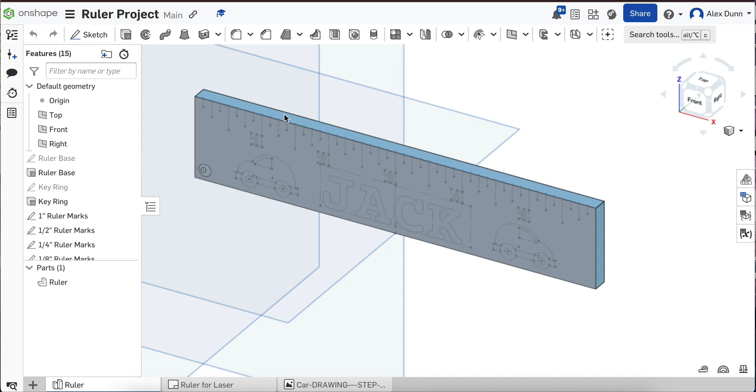I'll show you how to do some different things with your ruler: how to create the base outline, how to extrude it, and then how to draw some of the stuff on the face of the ruler.

This is my example that I showed you in class, but I'm going to start a new part studio just like you guys. I'm going to rename that ruler V2 because this is my second ruler.

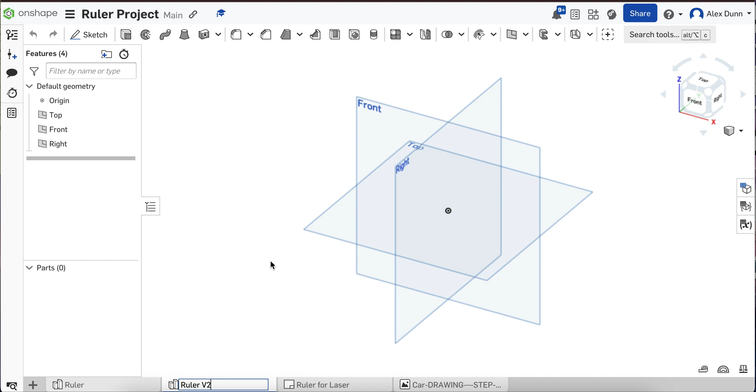Everyone should create their sketch on the front plane, because when we're laser cutting it, we're only laser cutting the front of the ruler, not any other part. I'm going to do a center point rectangle starting at the origin, and your ruler dimensions need to be 6 inches by 1¼ inch. So that's the base of your ruler.

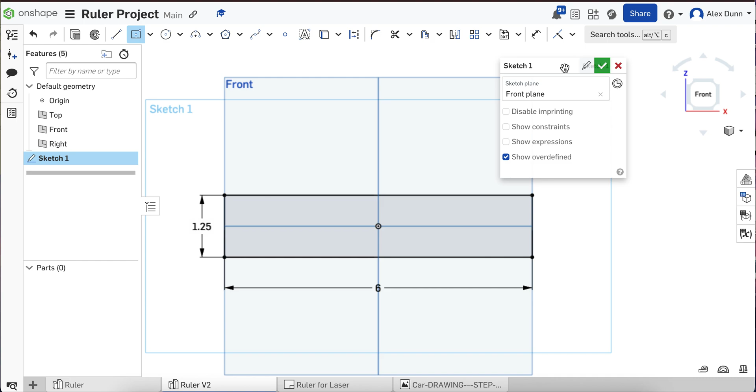Obviously you want to be naming things, but I'm just doing this as a tutorial, so I'm going to go as quickly as I possibly can so I'm not boring you guys.

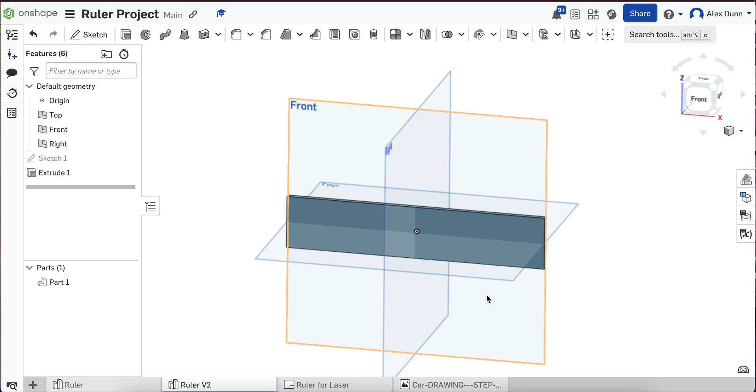Before you start sketching anything, we're going to extrude this to its thickness. You'll all be using acrylic that's 0.11 thick or masonite that's 0.11 thick, depending on what we decide. So it's going to be extruded to look like that. I'm going to hide all the planes so when I'm looking at my ruler, I'm not getting an obstructed view from anything else.

In order to draw on our ruler, we need to make a sketch. My recommendation is that you make each set of lines in a different sketch. That's going to help us once we're prepping for the laser.

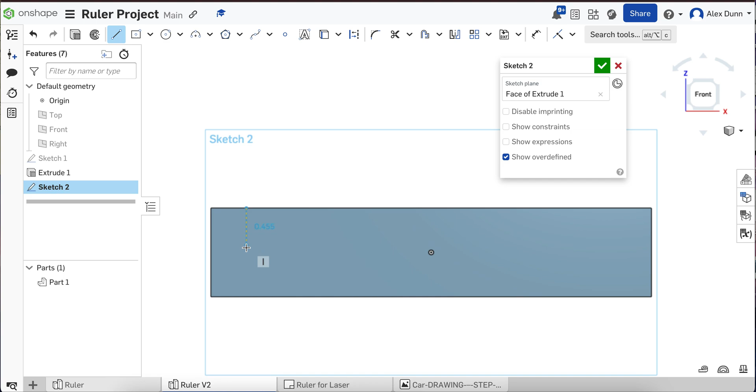For the tick marks on the ruler, you're just going to use the line tool. I'm going to start with the 1 inch lines. Those need to be 0.5 inches in length, and the 1 inch line needs to be 1 inch from the side.

If you wish, it's totally up to you — I'm just showing you the simplest way. And if that's going to be 2, that also needs to be 1 inch apart. So you guys see the gist.

You're going to be doing this for your inch lines, your ½ inch lines, your ¼ inch lines, and your 1/8 inch lines. That's good, but I would suggest doing everything in its own sketch.

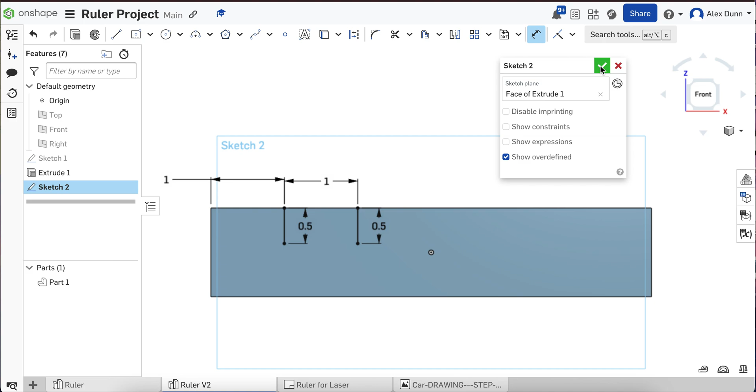So if those are my 1 inch lines, I would label this — let's go rename, 1 inch lines. And I renamed my document, which I did not want to do. Let's go back here and rename it 1 inch lines.

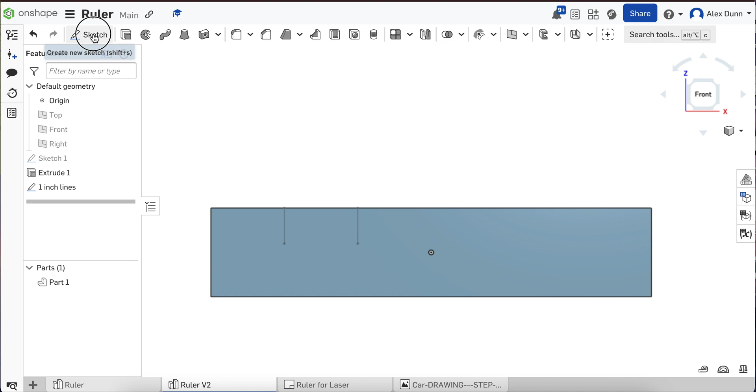I'm going to make a new sketch. If I was doing this for real and it wasn't just a tutorial, I'd do my ½ inch lines. I believe those are 3/8, 0.375 — you can look back at the project brief to confirm that.

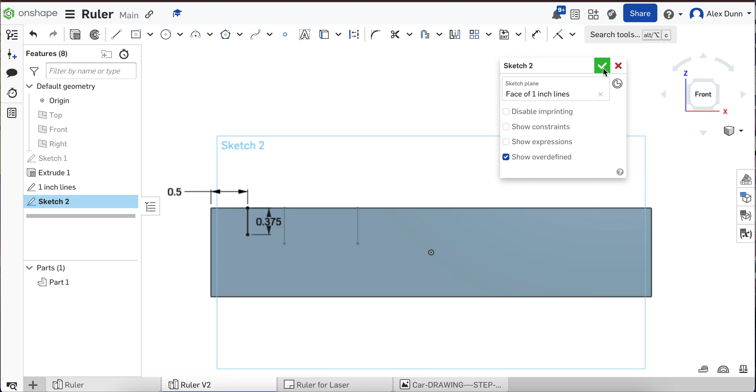Obviously if it's ½ inch, it needs to be ½ inch from the corner. You guys get the gist, so you'd draw all your ½ inch lines. Then you'd have a new sketch with your ¼ inch lines, your 1/8 inch lines. You guys get it, okay.

The next thing I want to show you is how to use the text tool. You're going to sketch on the face of the ruler just like we did, and one of the specifications is you need to include your name. So you're going to choose the text tool and draw a text box.

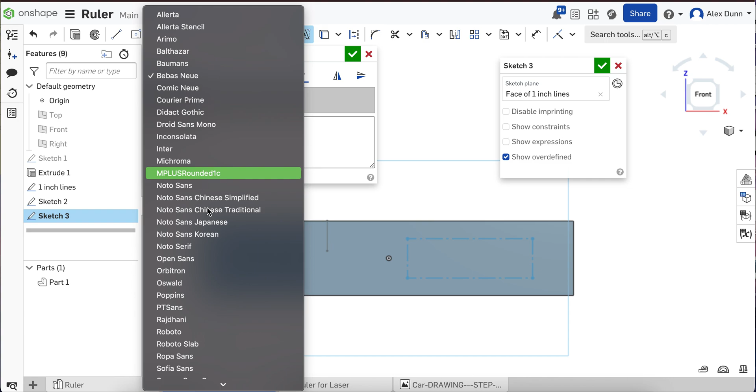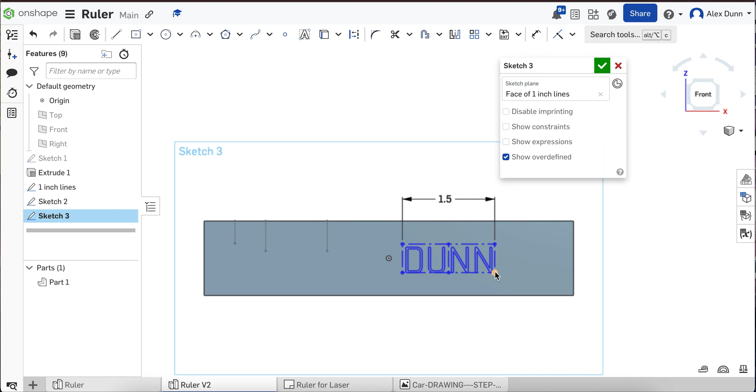You can change it to any of these fonts that exist within Onshape. If I write my last name and press the check, it shows up there. To change how large or small it is, you click on the actual text and change the size. If you want to move it, you grab one of the corners and move it where you want it to go.

I would also suggest doing that in a new sketch. So each thing is going to be its own sketch, and that's it for this tutorial.